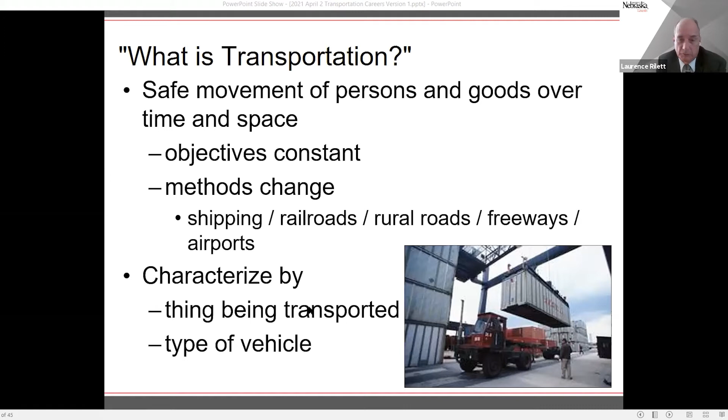I want to briefly talk about the system, because this is what really sets us apart in terms of what transportation is. It's a component of elements. If I talked about a civil engineering system - and I'm a civil engineer, so I tend to talk about these types of things - there's usually a couple of things: we arrange some elements to resist a load on a system, and we have to do it economically. For the engineers in the audience, this should be pretty familiar - this is a lot of what your coursework is related to. We have some load, we have something we're going to arrange, and we have to do it economically.

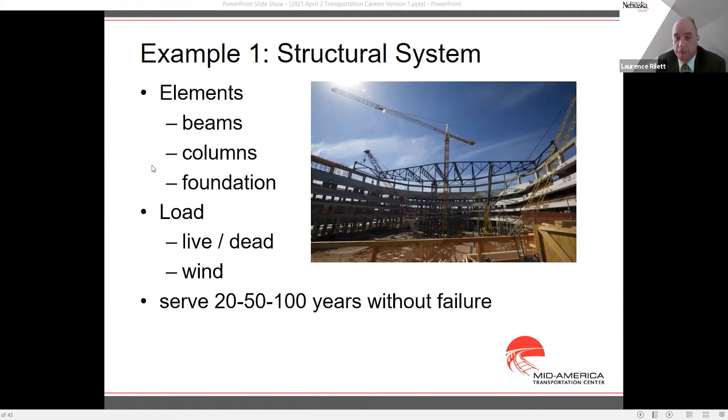So a structural system - we have elements, we have beams, we have columns, we have a foundation. We have a load, that's the weight of the building. We have a live load for things that change over time. We have wind loads, we might have an earthquake load. We're designing these buildings for 20 to 50 to 100 years without failure. For structural systems, we're pretty good at it as a profession. We typically don't walk into buildings going, 'I wonder if this building's going to fall down on me.' We do a pretty good job of arranging these elements to resist the load and do it economically.

How old is civil engineering? Well, Hammurabi lived about 4,000 years ago. He was the ruler of Babylonia, and he is famous for putting down a code of laws, some of which apply to engineering.

So here's my first quiz for everyone. His code covered lots of things, but one was about building: if a builder builds a house and doesn't do it correctly, and the house collapses and causes the death of the owner, that builder shall be put to blank. I'll ask the students - I'll look at the chat, I guess, if I can. What do you think the answer is from 4,000 years ago?

Anyone? Yeah, I guess we could talk, because I can't really see the chat. Oh, maybe right there - there it is. Death, yes - he's going to be put to death. So pretty hardcore, 4,000 years ago.

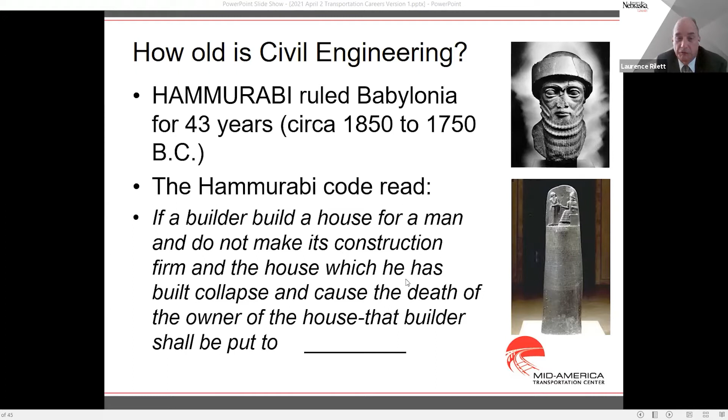So for all the engineers out there, we don't do that now - you're still held liable, we're professional engineers. But 4,000 years ago, if you built something and it collapsed, you're in trouble, right? For the lawyers out there, this is also one of the first sets of laws. If you want to see this document, it's actually etched in stone, and if you're ever fortunate enough to go to Paris and the Louvre, it's actually in the Louvre that you can see it.

So this brings us to modern times. This is John Hillman, who patented a beam for railways. You might say it's an interesting picture - what's Mr. Hillman doing? It's very similar to the previous picture. This is a tradition in bridge building, particularly in railways, that's been going on for about 150 years. When they first started building bridges for railroads, the engineer would often stand under it the first time it was used. So if you think about it, you'd have to be pretty sure of your design if you're going to stand under a bridge the first time it's used by a railway.

And this is what it's doing now. Now, is there any danger of collapse? No, he designed it correctly. The engineers designed these, but it's still that same tradition, right? That you're responsible for what you do, and you should be able to have the confidence in it that you would use it.

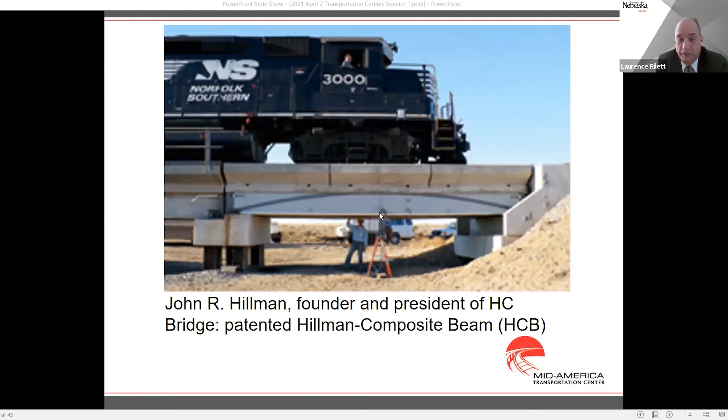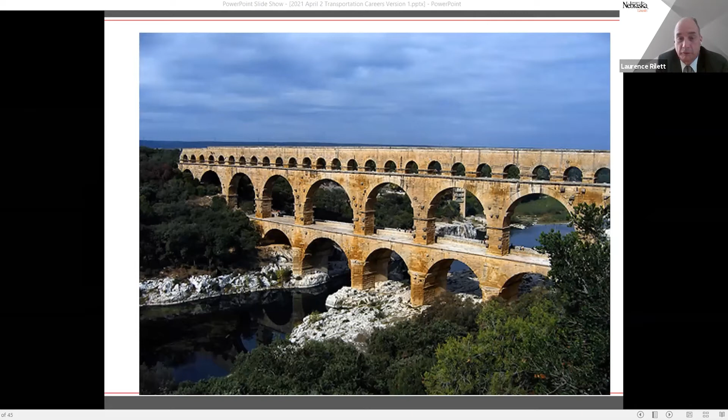This is the Pont du Gard aqueduct in southern France. It was built 2,000 years ago for water, was then converted to roads. Still standing, still useful - you can go see it today. It's a quite impressive engineering structure.

And you can see the same things - we build the elements to withstand a load. In this case, it lasted 2,000 years.

Transportation systems are slightly different. Our elements are highways, arterial roadways, local streets, traffic signals. The load is the demand for movement - so we have vehicles, passenger freight, and all of these types of things.

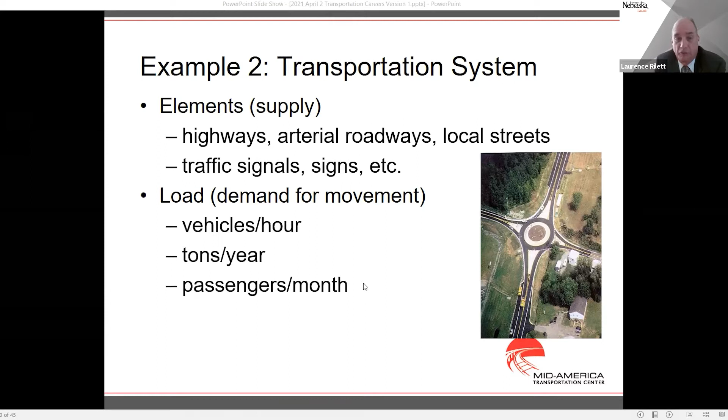It's a little bit different than structural because it's fail-soft. We design it to fail twice a day, right? And if you've ever driven in Dallas or Houston or Chicago at rush hour, you know it's not free movement - it's pretty congested.

You could say, well, why don't we design it so that there is no fail, it never gets congested - but you find out it gets very expensive to build a road for peak periods. So we just make a trade-off on that.

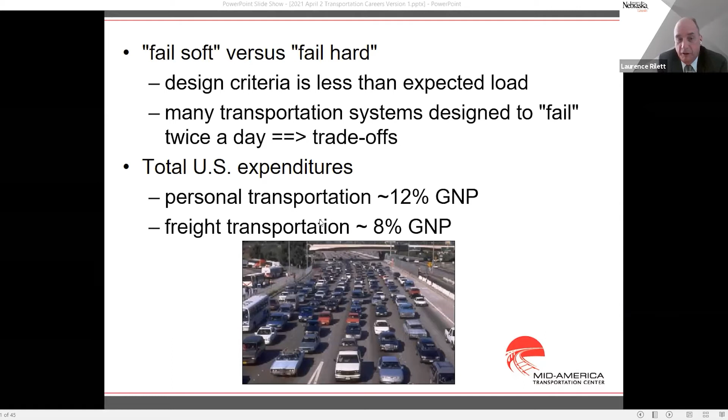Transportation is really an expensive part of the U.S. economy - it's probably about 20% of our gross national product is just related to transportation, and it's a key part of our economy. If we don't have a good transportation system, we're probably not going to have a good economy. You saw the infrastructure bill that was just announced this week, where they're trying to improve the infrastructure and particularly parts of the transportation system. This is why - if you have a strong transportation system, you have a strong economy.

So that's an introduction to transportation. What's a career? Well, for those of you who are engineers, almost all aspects of engineering are part of transportation: aeronautical, chemical, mechanical, electrical, and civil. All of those are instrumental parts - there are careers in here that are very productive and very rewarding.

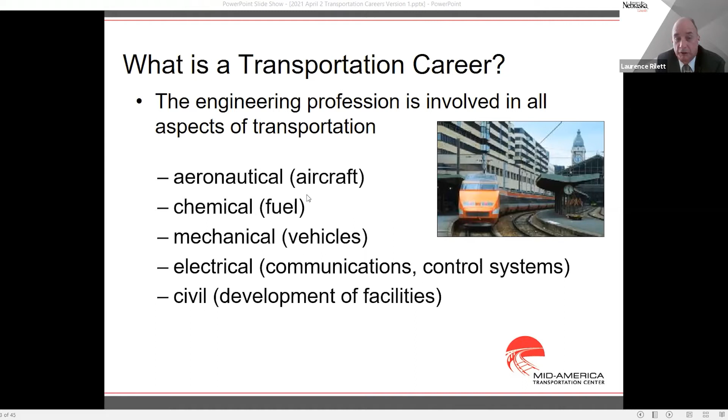But it's also very multidisciplinary, as Dr. Perkins was indicating. If you're in economics, environmental science, planning or statistics, psychology and human factors, public administration, law or business - that's also involved in transportation. We work a lot with people in our center in these areas.

The other nice thing about transportation is it's very people-oriented. You're working directly with people, you're making their lives better. It's not simply engineering - that's why cognitive psychology and the social sciences all come involved with it, because it impacts people. You have to interact with them when you're designing and operating your system. So it's not just simply engineering.

And really what it is, is identifying problems - these careers - and finding solutions, which we're going to go into next. So what's a transportation problem?

So I'm going to ask everyone what they think current transportation problems are. If you could put it into the chat - what do you think a transportation problem is that you've seen in your careers at the universities? Anything you see in a transportation system that you wish we had a solution for?

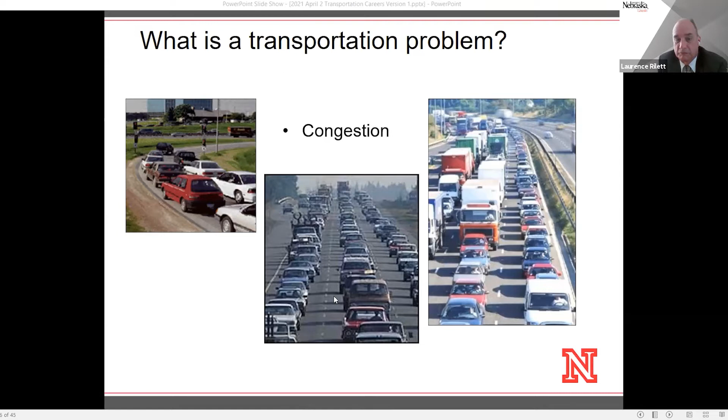So let's see what I wrote down. So all those are great answers. Certainly congestion, right, on this first slide, comes in many forms.

So if you're looking at capacity, how many people can you put in a train? You can actually put in a lot. Now, if you thought New York - if you've ever been in New York and taken their subways and thought it was congested - this is sort of a slightly a magnitude greater than that.

We talked about safety, right? Incidents and crashes. If you pay attention to these things, almost without exception, I can guarantee you almost everyone on this call has been impacted by crashes, to someone being seriously hurt or killed that they know. We have in the US approximately 35,000 fatalities a year on our roadways. Just a very large amount.

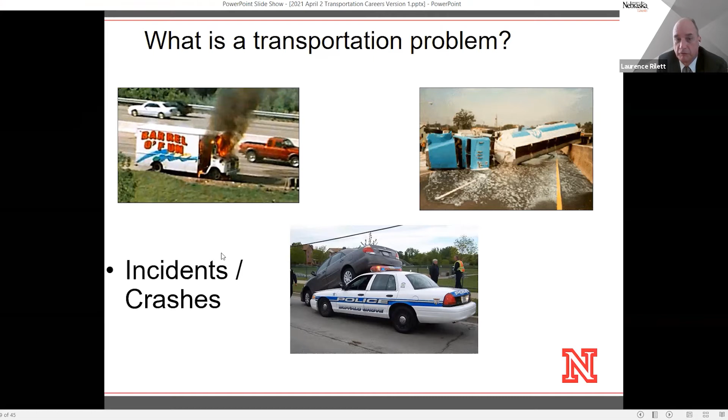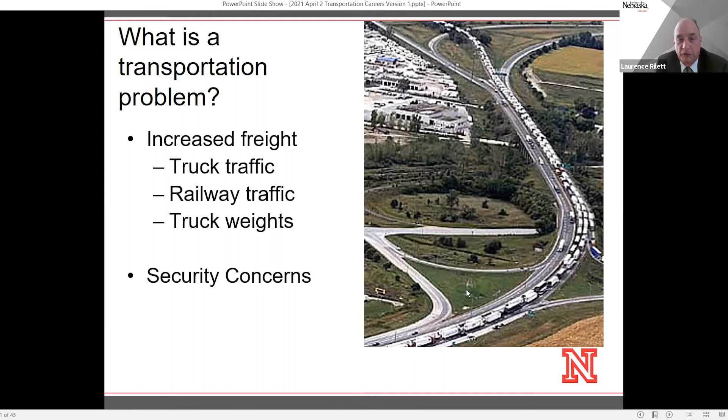So what's a transportation problem? Another one, security. Increased freight security concerns. This is trucks trying to get into the United States, going through security checkpoints. Everything's increasing. The increased freight is going to increase by about 40% by 2040, and 48% of that is hazardous goods. We have all kinds of nasty stuff on our roads and railways that impact us negatively.

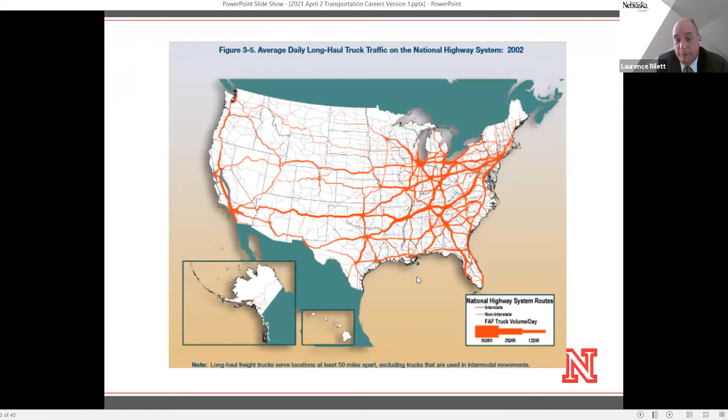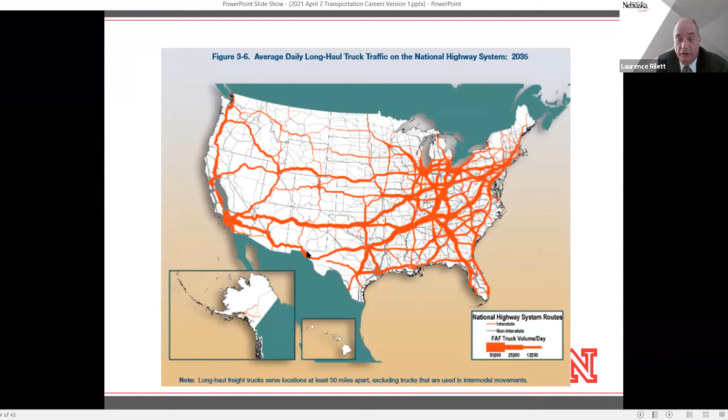This is a map of the United States showing the freight movements in 2002, and this is what it's predicted to be 15 years from now. You can pretty much see where you live, how much truck traffic you have on your roads now, and it's going to be increasing by about 40%. So how, as a transportation professional, are you going to handle this great increase?

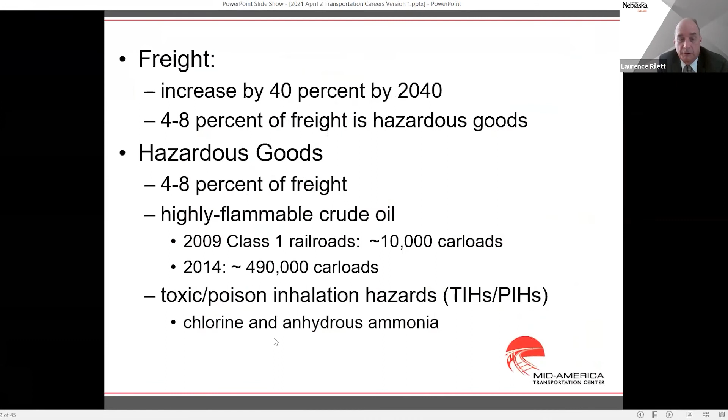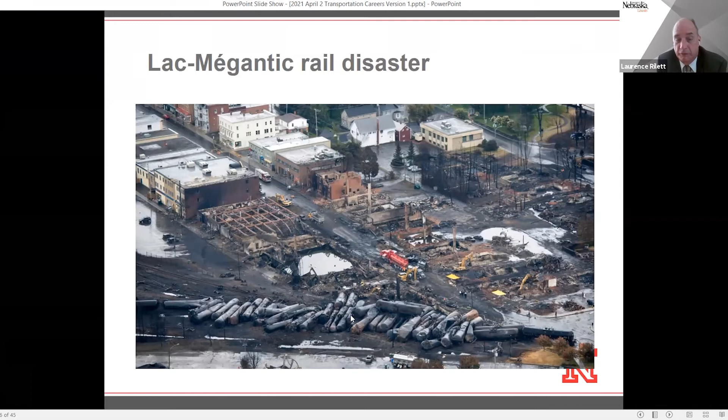In the U.S., this was all North Dakota crude, from the Bakken oil fields. The number of these vehicles has gone up from 10,000 carloads in 2009 to about 500,000 of these types of trains a year. And they're coming through our area, all the way from North Dakota down to the refineries in Oklahoma and Texas. So it is a big problem.

Another transportation problem someone mentioned: bridges. We have aging infrastructure. We built the interstate system about 50 to 60 years ago, so we have to rebuild it, and that's sort of what that infrastructure bill was indicating. For those of you from Houston, you might recognize this - this is the Gulf Freeway at its original build. It doesn't look that way now, but that's the original design of it.

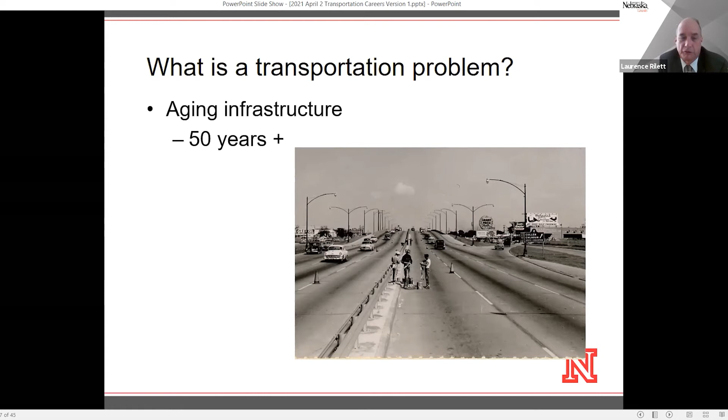So this is going to impact everything, right? Having this large cohort of older U.S. citizens affects how they travel. How are we going to get them to their places? How can they stay in their house and still get around? How can they get to their appointments? How can they be successful? And it affects you personally too.

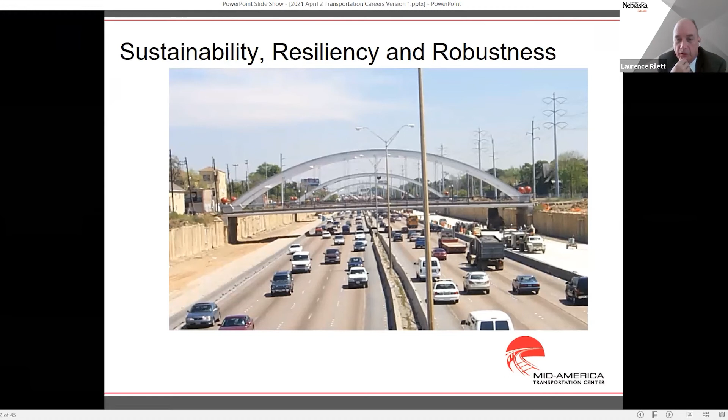So we don't like it when they flood, but they're actually designed to handle this water. It's not a complete catastrophe. When this water gets into the residential areas, that's when it's a real problem, not so much when it floods the transportation system. So getting first responders into an extreme event like a hurricane, and getting people out, is also a transportation problem.

Potential solutions, you've heard some of it. It's like build more capacity, right? The issue with that is we don't have land. We can't go around like we used to 60 years ago, just taking land from people, tearing down their houses and building roads. It's very difficult to do, almost impossible.

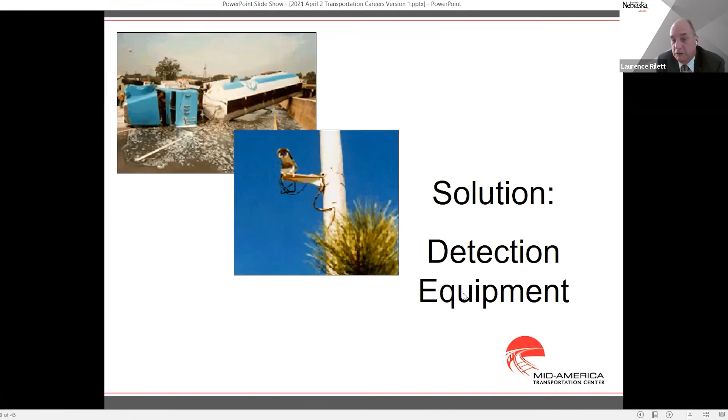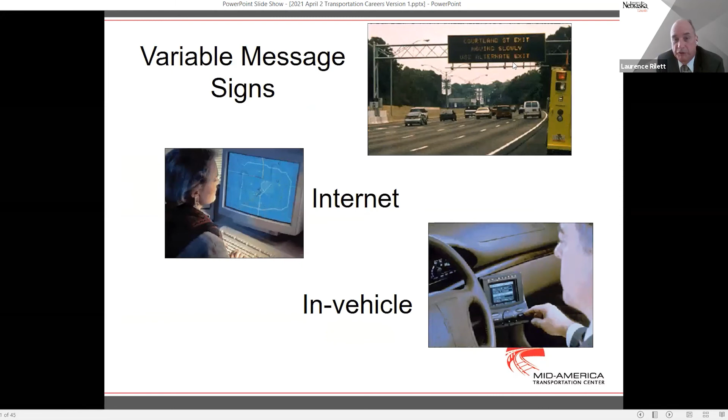So what we have to do is use new techniques, more intelligent use of available resources, which comes into these intelligent transportation systems. You have an incident on a freeway, you get that information, send it to a traffic management center, dispatch first responders, give out information on variable message signs, the internet, in the vehicle, and operate in a way that's much more efficient. That's sort of the future of transportation, these intelligent transportation systems.

I love this picture because I used it 20 years ago. You can look at the technology and go, oh, that's really old technology. Yeah, and of course it is, because it's 20 years old. Everything's better now, we have much better technology, much more sophisticated things, but the essence of it is the same.

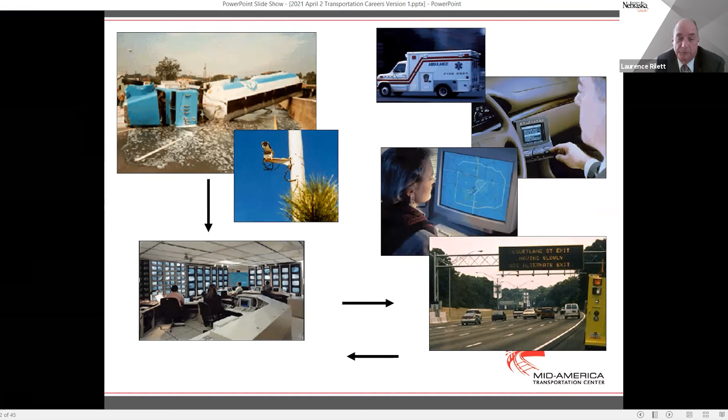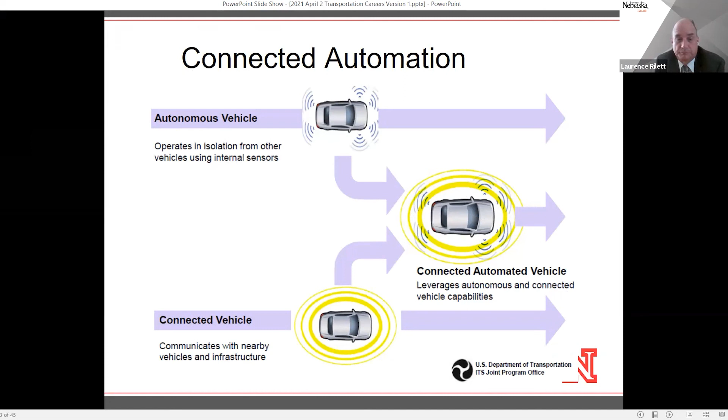Truck platooning is one example where the vehicles follow each other much closer. You can get higher capacity and it can be safer. I was going to show you some of our research, but since my videos aren't showing, I'll skip that. But we do a lot of work here on these types of automated vehicle research.

Concluding remarks, transportation careers solve very complex and important problems. What I wanted to get across, as Dr. Perkins indicated, is that it's also very multidisciplinary. There are many options - engineering, planning, law, medicine. We do a lot of work with our medical centers in Kansas and Nebraska in our center as part of our research. So I don't want to give the opinion it's just engineering. It's much more complex than that, and the problems we're facing are much more complex, which is why we need a multidisciplinary approach.